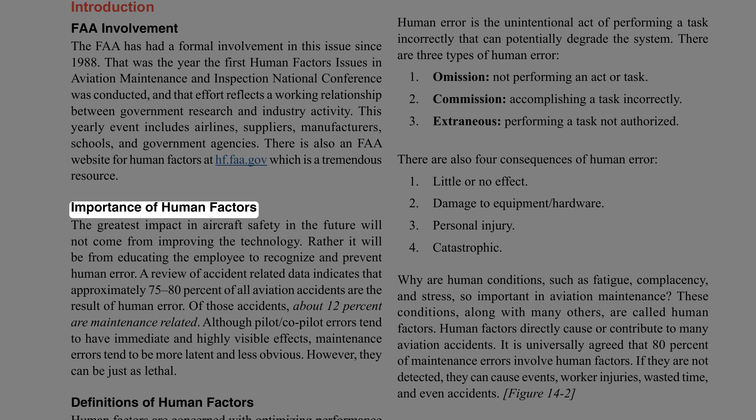Importance of human factors: the greatest impact on aircraft safety in the future will not come from improving the technology, but from educating employees to recognize and prevent human error. A review of accident-related data indicates that approximately 75 to 80% of all aviation accidents are the result of human error. Of those accidents, about 12% are maintenance-related.

Although pilot and co-pilot errors tend to have immediate and highly visible effects, maintenance errors tend to be more latent and less obvious. However, they can be just as lethal.

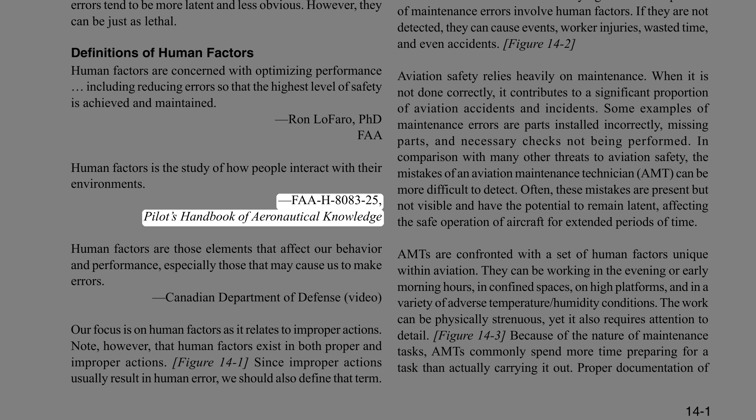Definitions of human factors: Human factors are concerned with optimizing performance, including reducing errors, so that the highest level of safety is achieved and maintained. Ron LoFaro, PhD, FAA: Human factors is the study of how people interact with their environments. From the FAA H-8083-25, Pilot's Handbook of Aeronautical Knowledge: Human factors are those elements that affect our behavior and performance, especially those that may cause us to make errors. Canadian Department of Defense video.

Our focus is on human factors as it relates to improper actions. Note, however, that human factors exist in both proper and improper actions. Since improper actions usually result in human error, we should also define that term. Human error is the unintentional act of performing a task incorrectly that can potentially degrade the system. There are three types of human error: omission, not performing an act or task; commission, accomplishing a task incorrectly; and extraneous, performing a task not authorized.

There are also four consequences of human error: little or no effect, damage to equipment or hardware, personal injury, or catastrophic.

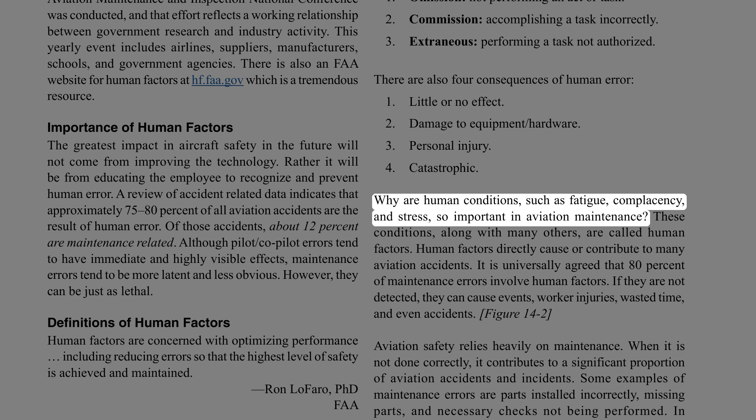Why are human conditions such as fatigue, complacency, and stress so important in aviation maintenance? These conditions, along with many others, are called human factors. Human factors directly cause or contribute to many aviation accidents. It is universally agreed that 80% of maintenance errors involve human factors. If they are not detected, they can cause events, worker injuries, wasted time, and even accidents.

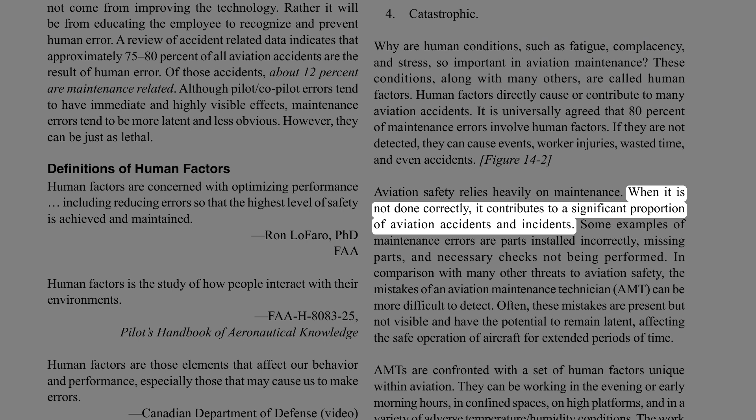Aviation safety relies heavily on maintenance. When it is not done correctly, it contributes to a significant proportion of aviation accidents and incidents. Some examples of maintenance errors are parts installed incorrectly, missing parts, and necessary checks not being performed.

In comparison with many other threats to aviation safety, the mistakes of an aviation maintenance technician (AMT) can be more difficult to detect. Often, these mistakes are present but not visible, and have the potential to remain latent, affecting the safe operation of aircraft for extended periods of time.

AMTs are confronted with a set of human factors unique within aviation. They can be working in the evening or early morning hours, in confined spaces, on high platforms, and in a variety of adverse temperature and humidity conditions. The work can be physically strenuous, yet it also requires attention to detail.

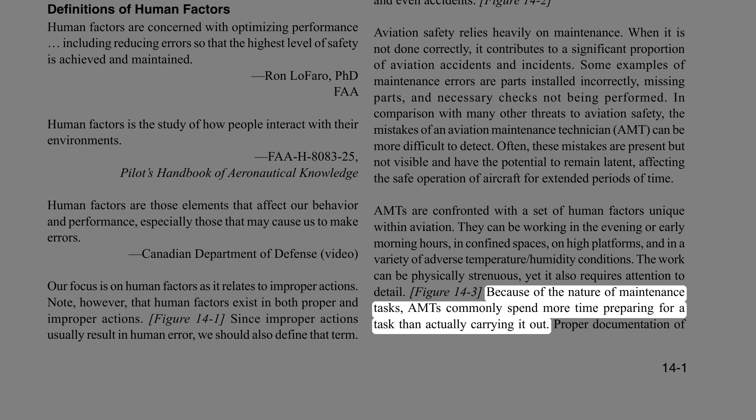Because of the nature of maintenance tasks, AMTs commonly spend more time preparing for a task than actually carrying it out. Proper documentation of all maintenance work is a key element, and AMTs typically spend as much time updating maintenance logs as they do performing the work.

Human factors awareness can lead to improved quality, an environment that ensures continuing worker and aircraft safety, and a more involved and responsible workforce. The reduction of even minor errors can provide measurable benefits, including cost reductions, fewer missed deadlines, reduction in work-related injuries, reduction of warranty claims, and reduction in more significant events that can be traced back to maintenance error.

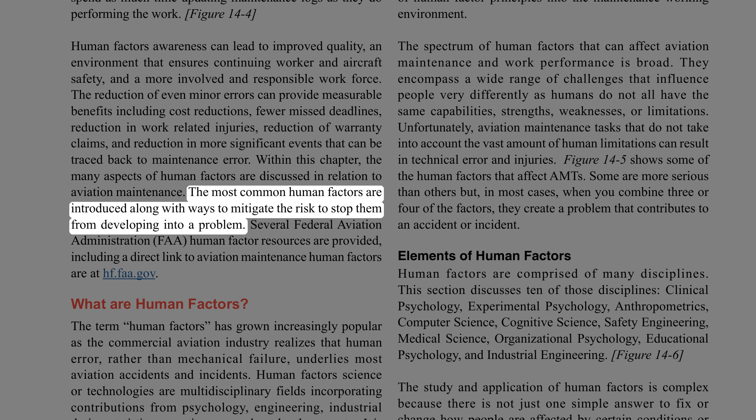Within this chapter, the many aspects of human factors are discussed in relation to aviation maintenance. The most common human factors are introduced along with ways to mitigate the risk to stop them from developing into a problem. Several FAA human factor resources are provided, including a direct link to aviation maintenance human factors at hf.faa.gov.

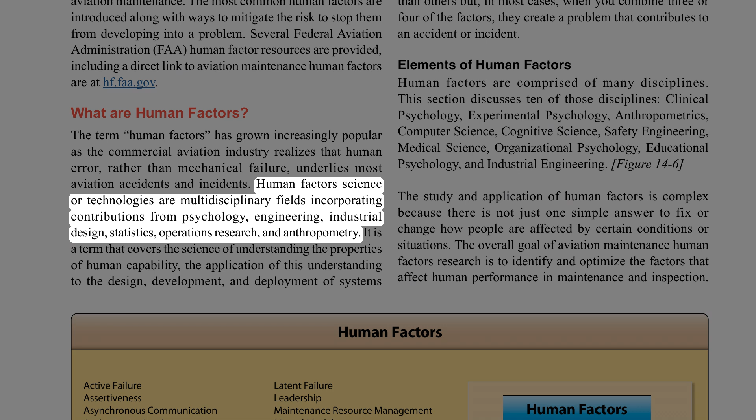What are human factors? The term has grown increasingly popular as the commercial aviation industry realizes that human error, rather than mechanical failure, underlies most aviation accidents and incidents. Human factors science or technologies are multidisciplinary fields incorporating contributions from psychology, engineering, industrial design, statistics, operations research, and anthropometry.

It is a term that covers the science of understanding the properties of human capability, the application of this understanding to the design, development, and deployment of systems and services, and the art of ensuring successful application of human factor principles into the maintenance working environment. The spectrum of human factors that can affect aviation maintenance and work performance is broad.

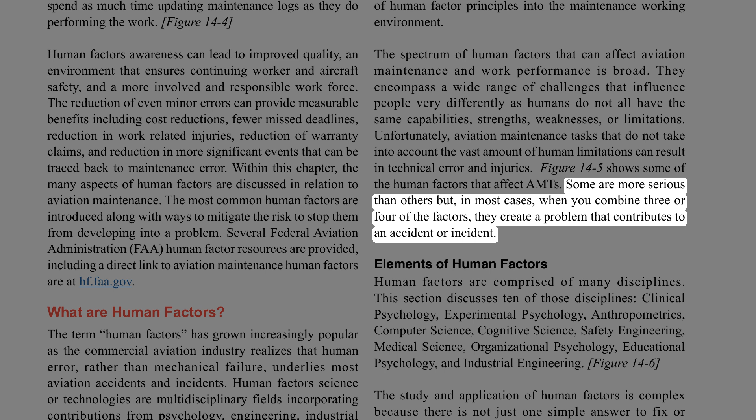They encompass a wide range of challenges that influence people very differently, as humans do not all have the same capabilities, strengths, weaknesses, or limitations. Unfortunately, aviation maintenance tasks that do not take into account the vast amount of human limitations can result in technical error and injuries. Figure 14-5 shows some of the human factors that affect AMTs. Some are more serious than others, but in most cases, when you combine 3 or 4 of the factors, they create a problem that contributes to an accident or incident.

Elements of human factors. Human factors are comprised of many disciplines. This section discusses 10 of those disciplines: clinical psychology, experimental psychology, anthropometrics, computer science, cognitive science, safety engineering, medical science, organizational psychology, educational psychology, and industrial engineering.

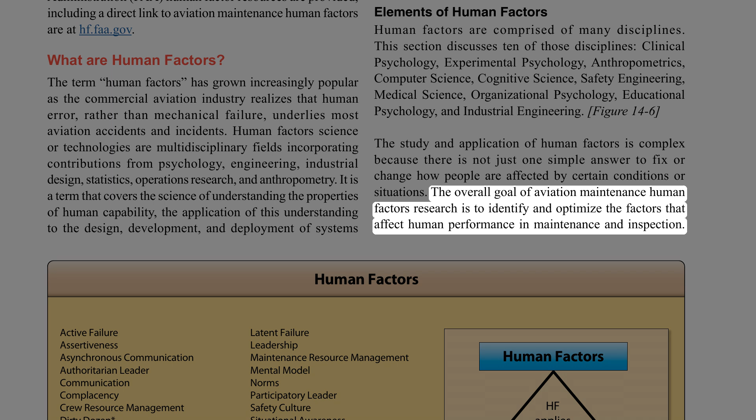The study and application of human factors is complex because there is not just one simple answer to fix or change how people are affected by certain conditions or situations. The overall goal of aviation maintenance human factors research is to identify and optimize the factors that affect human performance in maintenance and inspection. The focus initiates on the technician but extends to the entire engineering and technical organization. Research is optimized by incorporating the many disciplines that affect human factors in an effort to understand how people can work more efficiently and maintain work performance.

By understanding each of the disciplines and applying them to different situations or human behaviors, we can correctly recognize potential human factors and address them before they develop into a problem or create a chain of problems that result in an accident or incident. Clinical psychology.

Clinical psychology includes the study and application of psychology for the purpose of understanding, preventing, and relieving psychologically based distress or dysfunction, and to promote subjective well-being and personal development. It focuses on the mental well-being of the individual. Clinical psychology can help individuals deal with stress, coping mechanisms for adverse situations, poor self-image, and accepting criticism from coworkers.

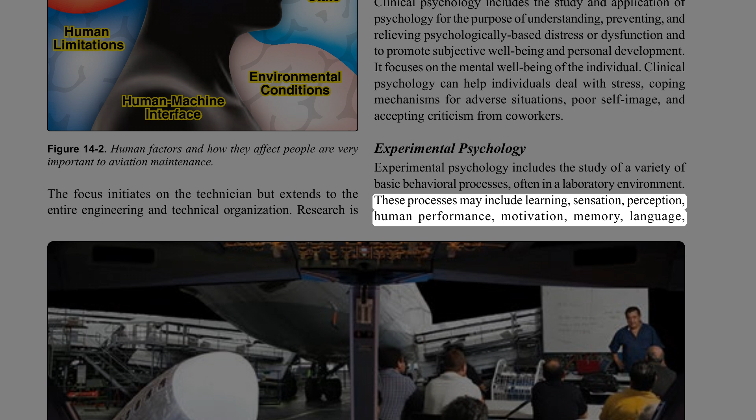Experimental psychology. Experimental psychology includes the study of a variety of basic behavioral processes, often in a laboratory environment. These processes may include learning, sensation, perception, human performance, motivation, memory, language, thinking, and communication, as well as the physiological processes underlying behaviors, such as eating, reading, and problem-solving. In an effort to test the efficiency of work policies and procedures, experimental studies help measure performance, productivity, and deficiencies.

Anthropometry. Anthropometry is the study of the dimensions and abilities of the human body. This is essential to aviation maintenance due to the environment and spaces that AMTs have to work with. For example, a man who is 6 feet 3 inches and weighs 230 pounds may be required to fit into a small crawl space of an aircraft to conduct a repair. Another example is the size and weight of equipment and tools.

Men and women are generally on 2 different spectrums of height and weight. Although both are equally capable of completing the same task with a high level of proficiency, someone who is smaller may be able to perform more efficiently with tools and equipment tailored to their size. In other words, one size does not fit all, and the term average person does not apply when employing such a diverse group of people.

Computer science. The technical definition for computer science is the study of the theoretical foundations of information and computation and of practical techniques for their implementation and application in computer systems. Yet how this relates to aviation maintenance is simpler to explain. As mentioned earlier, AMTs spend as much time documenting repairs as they do performing them. It is important that they have computer workstations that are comfortable and reliable. Software programs and computer-based test equipment should be easy to learn and use, and not intended only for those with high levels of computer literacy.

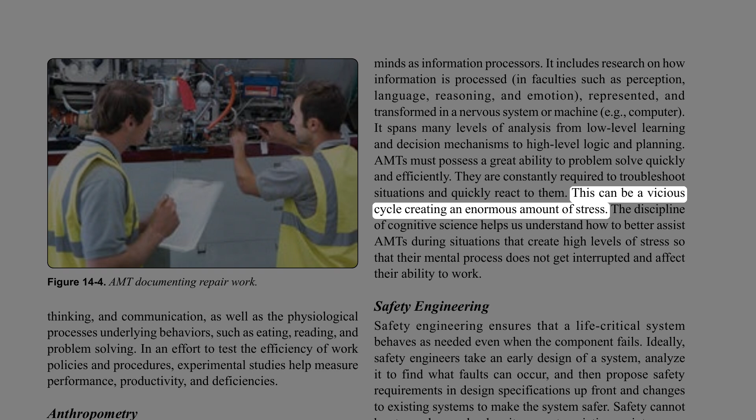AMTs must possess a great ability to problem-solve quickly and efficiently. They are constantly required to troubleshoot situations and quickly react to them. This can be a vicious cycle, creating an enormous amount of stress. The discipline of cognitive science helps us understand how to better assist AMTs during situations that create high levels of stress, so that their mental process does not get interrupted and affect their ability to work.

Safety engineering. Safety engineering ensures that a life-critical system behaves as needed even when the component fails. Ideally, safety engineers take an early design of a system, analyze it to find what faults can occur, and then propose safety requirements in design specifications up front and changes to existing systems to make the system safer.

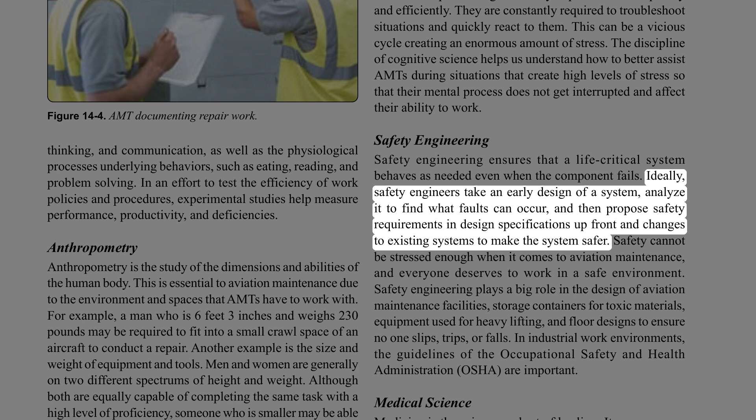Safety cannot be stressed enough when it comes to aviation maintenance, and everyone deserves to work in a safe environment. Safety engineering plays a big role in the design of aviation maintenance facilities, storage containers for toxic materials, equipment used for heavy lifting, and floor designs to ensure no one slips, trips, or falls. In industrial work environments, the guidelines of the Occupational Safety and Health Administration, OSHA, are important.

Medical science. Medicine is the science and art of healing. It encompasses a variety of healthcare practices evolved to maintain and restore health by the prevention and treatment of illness. Disposition and physical well-being are very important and directly correlated to human factors. Just like people come in many shapes and sizes, they also have very different reactions to situations due to body physiology, physical structures, and biomechanics.

Organizational psychology. Organizational psychologists are concerned with relations between people and work. Their interests include organizational structure and organizational change, workers' productivity and job satisfaction, consumer behavior, and the selection, placement, training, and development of personnel. Understanding organizational psychology helps aviation maintenance supervisors learn about the points listed below that, if exercised, can enhance the work environment and productivity.

Rewards and compensations for workers with good safety records. Motivation for workers to want to do well and work safely. Unifying work teams and groups so they get along and work together to get the job done right. Treating all workers equally.

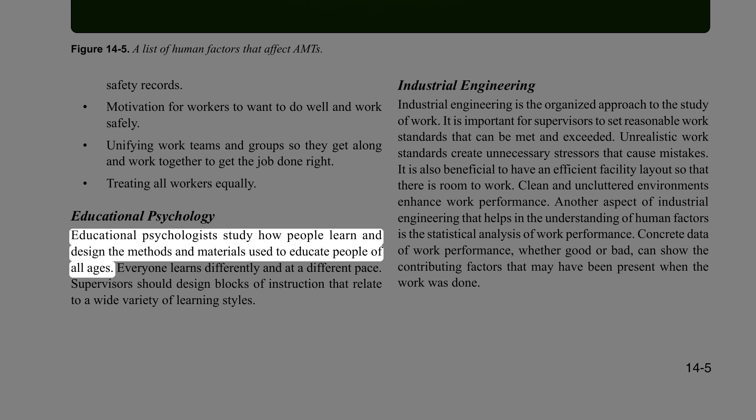Educational psychology. Educational psychologists study how people learn and design the methods and materials used to educate people of all ages. Everyone learns differently and at a different pace. Supervisors should design blocks of instruction that relate to a wide variety of learning styles.

Industrial engineering. Industrial engineering is the organized approach to the study of work. It is important for supervisors to set reasonable work standards that can be met and exceeded. Unrealistic work standards create unnecessary stressors that cause mistakes. It is also beneficial to have an efficient facility layout so that there is room to work. Clean and uncluttered environments enhance work performance.

Another aspect of industrial engineering that helps in the understanding of human factors is the statistical analysis of work performance. Concrete data of work performance, whether good or bad, can show the contributing factors that may have been present when the work was done.

History of human factors. Around 1487, Leonardo da Vinci began research in the area of anthropometrics. The Vitruvian Man, one of his most famous drawings, can be described as one of the earliest sources presenting guidelines for anthropometry. Around the same time, he also began to study the flight of birds.

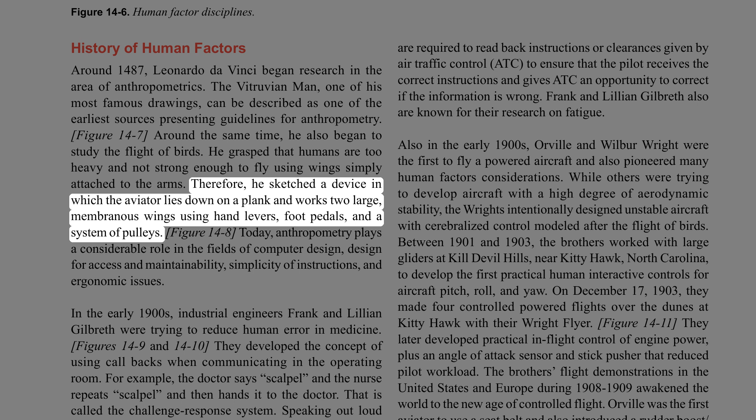He grasped that humans are too heavy and not strong enough to fly using wings simply attached to the arms. Therefore, he sketched a device in which the aviator lies down on a plank and works two large, membranous wings using hand levers, foot pedals, and a system of pulleys. Today, anthropometry plays a considerable role in the fields of computer design, design for access and maintainability, simplicity of instructions, and ergonomic issues.

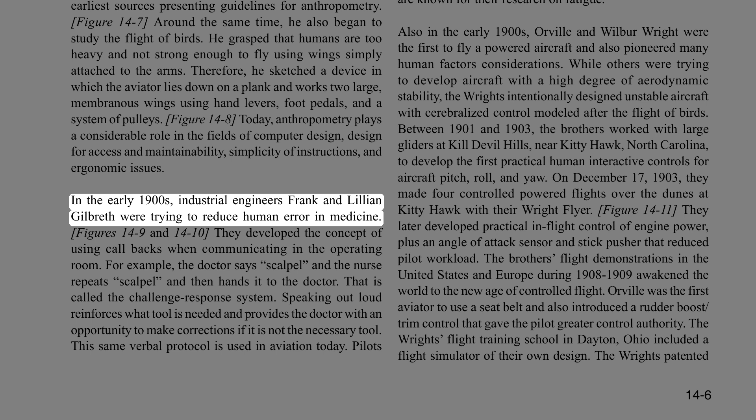In the early 1900s, industrial engineers Frank and Lillian Gilbreth were trying to reduce human error in medicine. They developed the concept of using callbacks when communicating in the operating room. For example, the doctor says, 'Scalpel,' and the nurse repeats, 'Scalpel,' and then hands it to the doctor. That is called the challenge response system.

Speaking out loud reinforces what tool is needed and provides the doctor with an opportunity to make corrections if it is not the necessary tool. This same verbal protocol is used in aviation today. Pilots are required to read back instructions or clearances given by Air Traffic Control, ATC, to ensure that the pilot receives the correct instructions and gives ATC an opportunity to correct if the information is wrong. Frank and Lillian Gilbreth also are known for their research on fatigue.

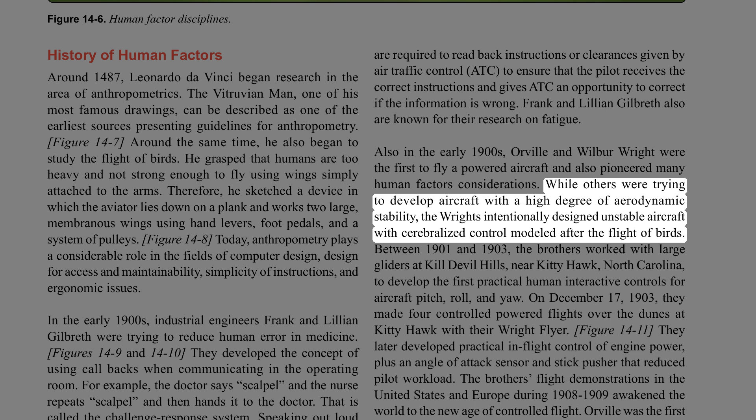Also in the early 1900s, Orville and Wilbur Wright were the first to fly a powered aircraft and also pioneered many human factors considerations. While others were trying to develop aircraft with a high degree of aerodynamic stability, the Wrights intentionally designed unstable aircraft with cerebralized control modeled after the flight of birds.

Between 1901 and 1903, the brothers worked with large gliders at Kill Devil Hills, near Kitty Hawk, North Carolina, to develop the first practical human interactive controls for aircraft pitch, roll, and yaw. On December 17, 1903, they made 4 controlled powered flights over the dunes at Kitty Hawk with their Wright Flyer.

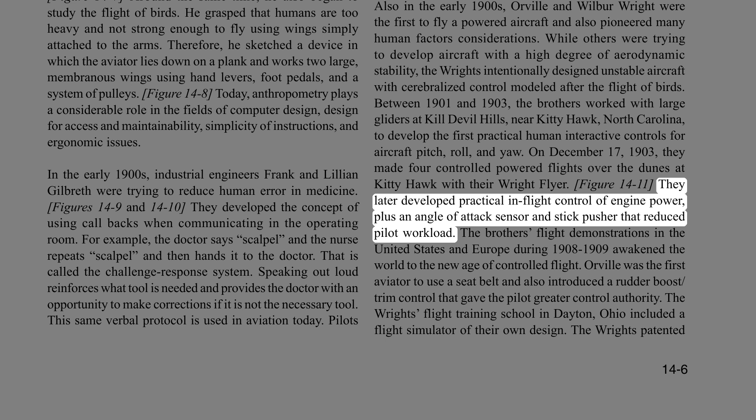They later developed practical in-flight control of engine power, plus an angle of attack sensor and stick pusher that reduced pilot workload. The brothers' flight demonstrations in the United States and Europe during 1908-1909 awakened the world to the new age of controlled flight.

Orville was the first aviator to use a seatbelt and also introduced a rudder boost trim control that gave the pilot greater control authority. The Wright's flight training school in Dayton, Ohio included a flight simulator of their own design. The Wrights patented their practical airplane and flight control concepts, many of which are still in use today.

Prior to World War I, the only test of human-to-machine compatibility was that of trial and error. If the human functioned with the machine, he was accepted; if not, he was rejected. There was a significant change in the concern for humans during the American Civil War. The U.S. Patent Office was concerned about whether the mass-produced uniforms and new weapons could be used effectively by the infantrymen.

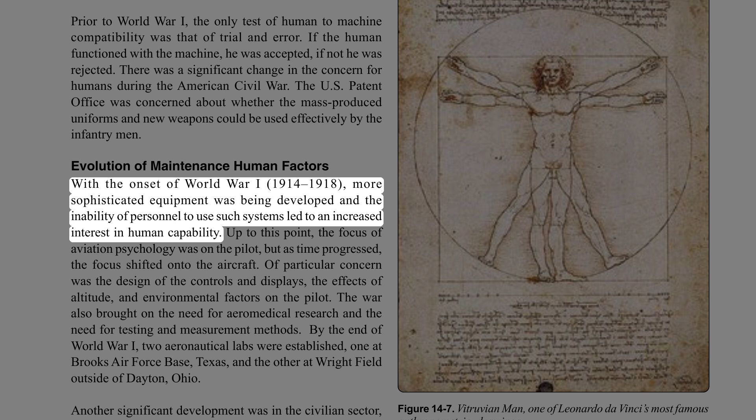With the onset of World War I, 1914 to 1918, more sophisticated equipment was being developed and the inability of personnel to use such systems led to an increased interest in human capability. Up to this point, the focus of aviation psychology was on the pilot, but as time progressed, the focus shifted onto the aircraft. Of particular concern was the design of the controls and displays, the effects of altitude, and environmental factors on the pilot. The war also brought on the need for aeromedical research and the need for testing and measurement methods. By the end of World War I, two aeronautical labs were established, one at Brooks Air Force Base, Texas, and the other at Wright Field outside of Dayton, Ohio.

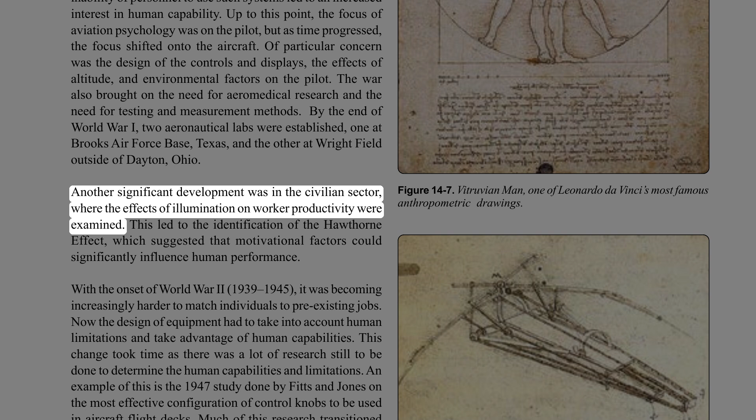Another significant development was in the civilian sector, where the effects of illumination on worker productivity were examined. This led to the identification of the Hawthorne effect, which suggested that motivational factors could significantly influence human performance.

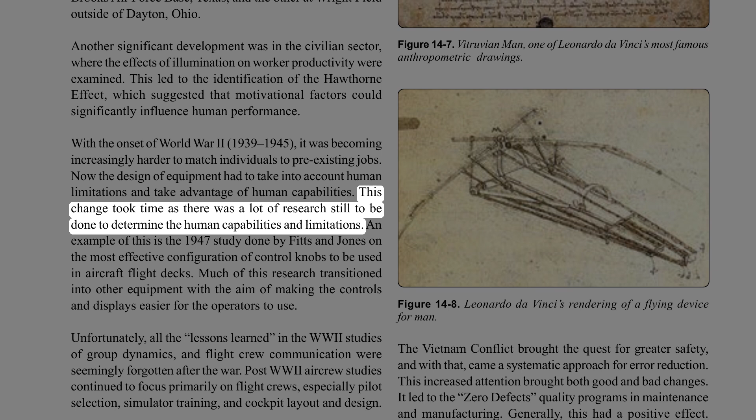With the onset of World War II, 1939 to 1945, it was becoming increasingly harder to match individuals to pre-existing jobs. Now the design of equipment had to take into account human limitations and take advantage of human capabilities. This change took time as there was a lot of research still to be done to determine the human capabilities and limitations. An example of this is the 1947 study done by Fitts and Jones on the most effective configuration of control knobs to be used in aircraft flight decks.

Much of this research transitioned into other equipment with the aim of making the controls and displays easier for the operators to use. Unfortunately, all the lessons learned in the World War II studies of group dynamics and flight crew communication were seemingly forgotten after the war.

Post-World War II aircrew studies continued to focus primarily on flight crews, especially pilot selection, simulator training, and cockpit layout and design. Subsequent studies of the technician focused on individual competency and included equipment design, ergonomics.

The Vietnam conflict brought the quest for greater safety, and with that, came a systematic approach for error reduction. This increased attention brought both good and bad changes. It led to the zero defects quality programs in maintenance and manufacturing. Generally, this had a positive effect.

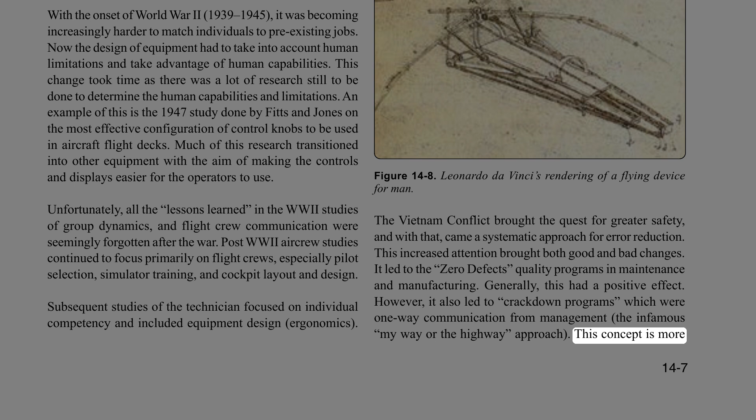However, it also led to crackdown programs, which were one-way communication from management, the infamous 'my way or the highway' approach. This concept is more dictatorial than democratic, and typically had a long-term negative effect on the company. This crackdown approach for behavior control is based upon fear and punishment, which creates a problem. Errors are driven into hiding, and then become apparent later, usually at a more critical time, Murphy's Law.

Additional attempts to develop foolproof equipment designs were added to the zero-defect manufacturing goal and began to find recognition in the maintenance world as well. Subsequent efforts focused on effects of positive rather than negative motivators. The results of this effort were a reversal of the crackdown method, and motivation due to increased morale often improved maintenance safety performance. Studies have shown that motivation resulting from negative sources seldom achieved the same effect.

This led to a participative management style recognized by some U.S. industry and a few airlines, but did not reach maintenance operations until much later. The airline deregulation, 1978 to 1988, effort had a profound effect upon the aviation community.

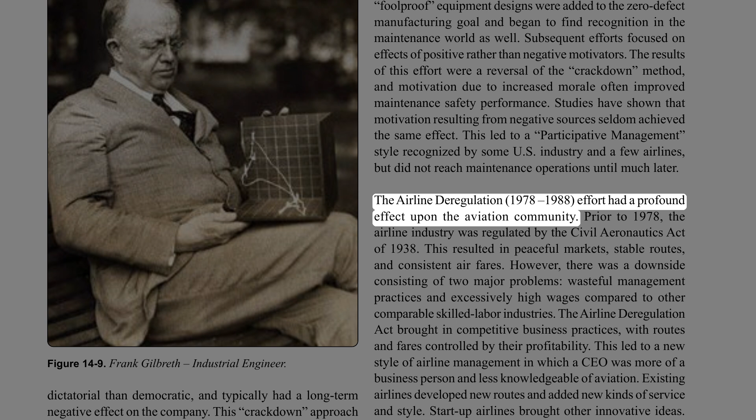Prior to 1978, the airline industry was regulated by the Civil Aeronautics Act of 1938. This resulted in peaceful markets, stable routes, and consistent airfares. However, there was a downside consisting of two major problems: wasteful management practices and excessively high wages compared to other comparable skilled labor industries. The Airline Deregulation Act brought in competitive business practices, with routes and fares controlled by their profitability.

This led to a new style of airline management in which a CEO was more of a business person and less knowledgeable of aviation. Existing airlines developed new routes and added new kinds of service and style. Startup airlines brought other innovative ideas. The numerous mergers and acquisitions added an increasing pressure to focus on the financial bottom line. Doing more with less became the byline.

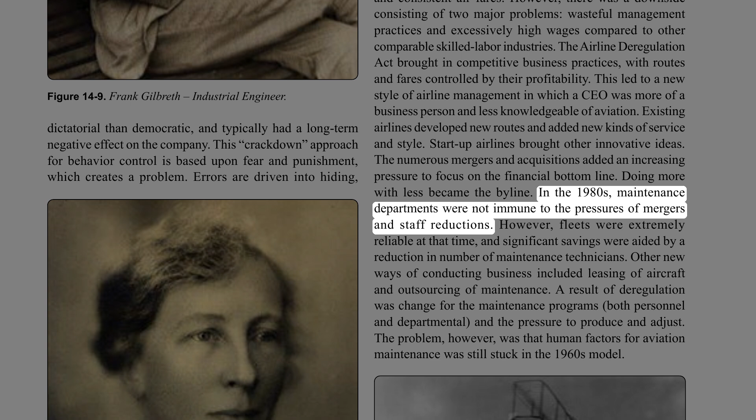In the 1980s, maintenance departments were not immune to the pressures of mergers and staff reductions. However, fleets were extremely reliable at that time, and significant savings were aided by a reduction in the number of maintenance technicians. Other new ways of conducting business included leasing of aircraft and outsourcing of maintenance.

A result of deregulation was change for the maintenance programs, both personnel and departmental, and the pressure to produce and adjust. The problem, however, was that human factors for aviation maintenance was still stuck in the 1960s model.

A detailed review of aviation literature published between 1976 and 1987 had very little to say about maintenance. Out of 50 published articles, only 15 even mention maintenance. Most of these articles deal with ergonomics. One article examines military engine design to solider-proof the maintenance duties, and one U.S. Navy article advocated more management control.

As human factors awareness progressed, a culture change occurred in U.S. carriers in the 1990s. Management behavior began to change, there were practical applications of systems thinking, organization structure was revised, and new strategy, policy, and values emerged. Virtually all of these involved communication and collaboration.

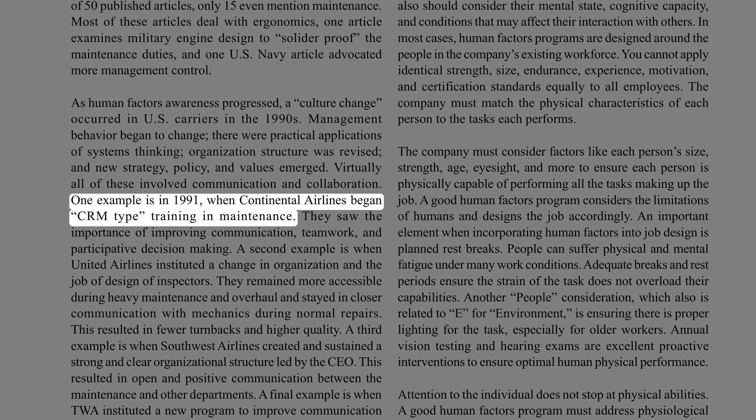One example is in 1991, when Continental Airlines began CRM-type training in maintenance. They saw the importance of improving communication, teamwork, and participative decision-making.

A second example is when United Airlines instituted a change in organization and the job design of inspectors. They remained more accessible during heavy maintenance and overhaul and stayed in closer communication with mechanics during normal repairs. This resulted in fewer turnbacks and higher quality.

A third example is when Southwest Airlines created and sustained a strong and clear organizational structure led by the CEO. This resulted in open and positive communication between the maintenance and other departments.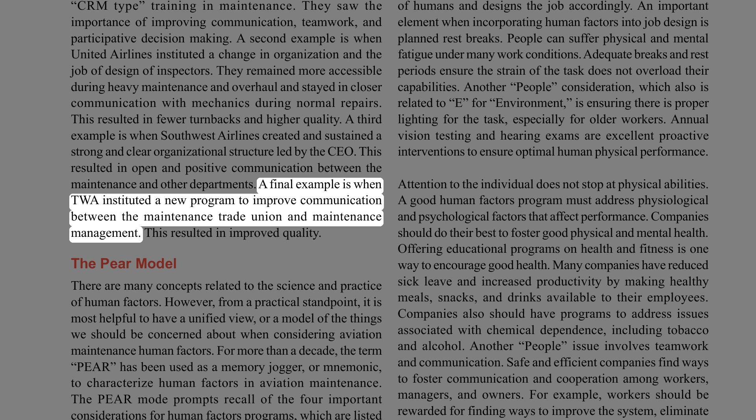A final example is when TWA instituted a new program to improve communication between the maintenance trade union and maintenance management. This resulted in improved quality.

The PEAR Model. There are many concepts related to the science and practice of human factors. However, from a practical standpoint, it is most helpful to have a unified view, or a model, of the things we should be concerned about when considering aviation maintenance human factors.

For more than a decade, the term PEAR has been used as a memory jogger, or mnemonic, to characterize human factors in aviation maintenance. The PEAR model prompts recall of the 4 important considerations for human factors programs: People who do the job, Environment in which they work, Actions they perform, and Resources necessary to complete the job.

People. Aviation maintenance human factors programs focus on the people who perform the work and address physical, physiological, psychological, and psychosocial factors. The programs must focus on individuals, their physical capabilities, and the factors that affect them. They also should consider their mental state, cognitive capacity, and conditions that may affect their interaction with others.

In most cases, human factors programs are designed around the people in the company's existing workforce. You cannot apply identical strength, size, endurance, experience, motivation, and certification standards equally to all employees. The company must match the physical characteristics of each person to the tasks each performs, considering factors like size, strength, age, eyesight, and more to ensure each person is physically capable of performing all the tasks making up the job.

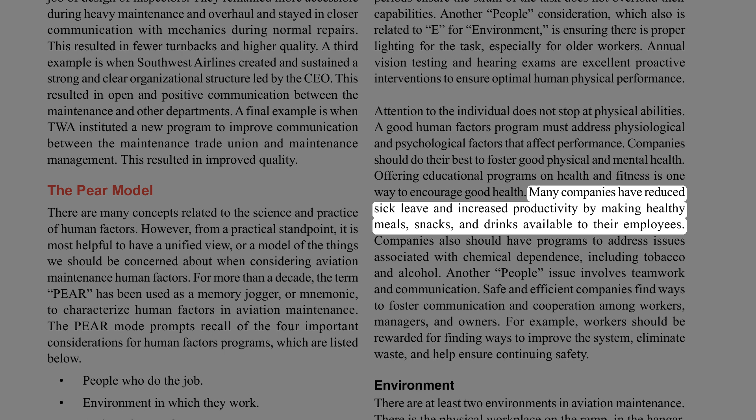Attention to the individual does not stop at physical abilities. A good human factors program must address physiological and psychological factors that affect performance. Companies should do their best to foster good physical and mental health. Offering educational programs on health and fitness is one way to encourage good health. Many companies have reduced sick leave and increased productivity by making healthy meals, snacks, and drinks available to their employees. Companies also should have programs to address issues associated with chemical dependence, including tobacco and alcohol.

Another people issue involves teamwork and communication. Safe and efficient companies find ways to foster communication and cooperation among workers, managers, and owners. For example, workers should be rewarded for finding ways to improve the system, eliminate waste, and help ensure continuing safety.

Environment. There are at least two environments in aviation maintenance. There is the physical workplace on the ramp, in the hangar, or in the shop. In addition, there is the organizational environment that exists within the company.

A human factors program must pay attention to both environments. Physical. The physical environment is obvious. It includes ranges of temperature, humidity, lighting, noise control, cleanliness, and workplace design.

Companies must acknowledge these conditions and cooperate with the workforce to either accommodate or change the physical environment. It takes a corporate commitment to address the physical environment. This topic overlaps with the resources component of Pear when it comes to providing portable heaters, coolers, lighting, clothing, and good workplace and task design.

Organizational. The second, less tangible, environment is the organizational one. The important factors in an organizational environment are typically related to cooperation, communication, shared values, mutual respect, and the culture of the company. An excellent organizational environment is promoted with leadership, communication, and shared goals associated with safety, profitability, and other key factors. The best companies guide and support their people and foster a culture of safety.

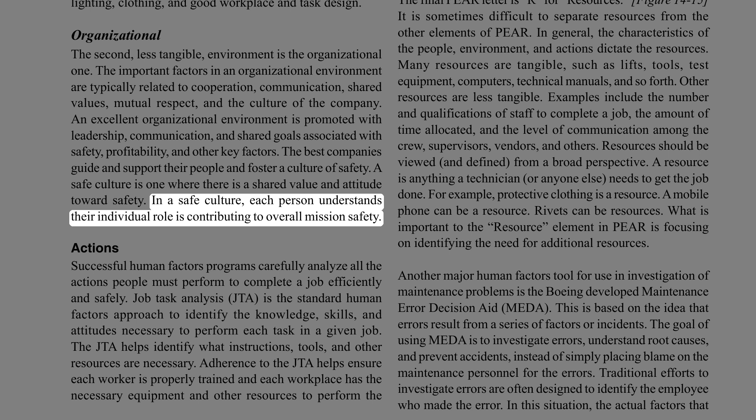A safe culture is one where there is a shared value and attitude toward safety. In a safe culture, each person understands their individual role is contributing to overall mission safety.

Actions. Successful human factors programs carefully analyze all the actions people must perform to complete a job efficiently and safely. Job Task Analysis, JTA, is the standard human factors approach to identify the knowledge, skills, and attitudes necessary to perform each task in a given job.

The JTA helps identify what instructions, tools, and other resources are necessary. Adherence to the JTA helps ensure each worker is properly trained and each workplace has the necessary equipment and other resources to perform the job. Many regulatory authorities require that the JTA serve as the basis for the company's general maintenance manual and training plan.

Many human factors challenges associated with use of job cards and technical documentation fall under actions. Clearly understandable documentation of actions ensures instructions and checklists are correct and usable.

Resources. The final Pear letter is R for resources. It is sometimes difficult to separate resources from the other elements of Pear. In general, the characteristics of the people, environment, and actions dictate the resources.

Many resources are tangible, such as lifts, tools, test equipment, computers, technical manuals, and so forth. Other resources are less tangible. Examples include the number and qualifications of staff to complete a job, the amount of time allocated, and the level of communication among the crew, supervisors, vendors, and others.

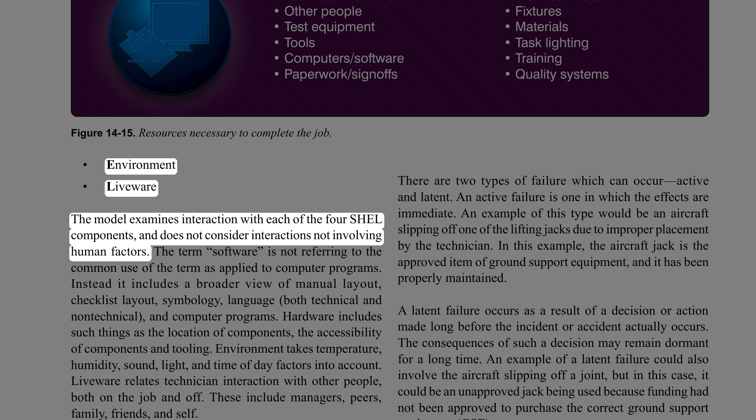Instead, it includes a broader view of manual layout, checklist layout, symbology, language, both technical and non-technical, and computer programs. Hardware includes such things as the location of components, the accessibility of components, and tooling.

Environment takes temperature, humidity, sound, light, and time of day factors into account. Liveware relates technician interaction with other people, both on the job and off. These include managers, peers, family, friends, and self.

No discussion of human factors is complete without reference to James Reason's model of accident causation. This diagram, which was introduced in 1990 and revised by Dr. Reason in 1993, is often referred to as the Swiss cheese model and shows how various holes in different systems must be aligned in order for an error to occur.

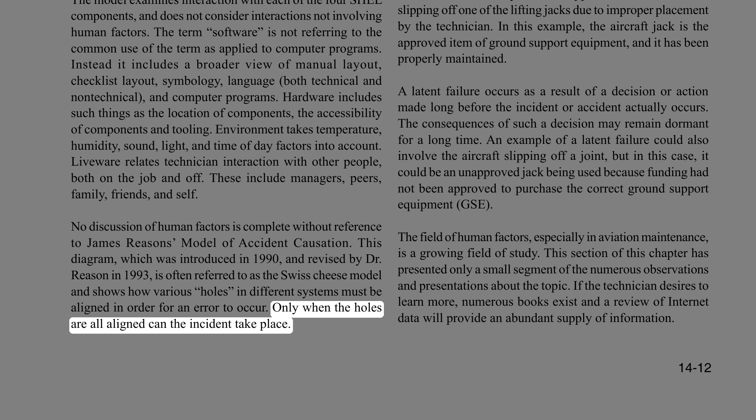Only when the holes are all aligned can the incident take place. There are two types of failure which can occur, active and latent. An active failure is one in which the effects are immediate. An example of this type would be an aircraft slipping off one of the lifting jacks due to improper placement by the technician.

In this example, the aircraft jack is the approved item of ground support equipment and has been properly maintained. A latent failure occurs as a result of a decision or action made long before the incident or accident actually occurs. The consequences of such a decision may remain dormant for a long time.

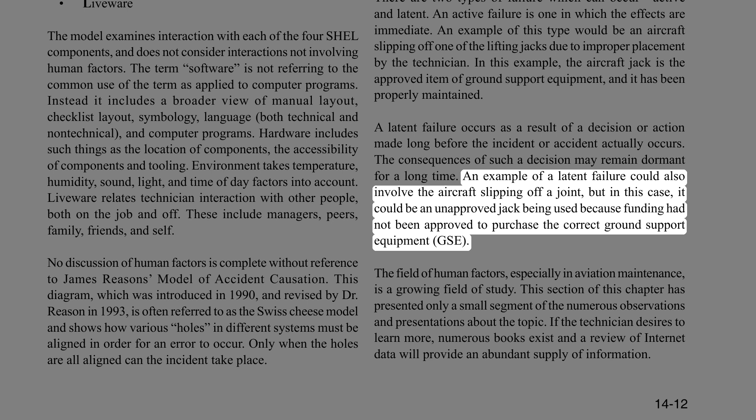An example of a latent failure could also involve the aircraft slipping off a jack, but in this case it could be an unapproved jack being used because funding had not been approved to purchase the correct ground support equipment, GSE. The field of human factors, especially in aviation maintenance, is a growing field of study.

This section of this chapter has presented only a small segment of the numerous observations and presentations about the topic. If the technician desires to learn more, numerous books exist and a review of internet data will provide an abundant supply of information. A good place to start researching would be the FAA's own website at hf.faa.gov.

This site, titled Human Factors in Aviation Maintenance and Inspection, HFAMI, provides access to products of the Federal Aviation Administration Flight Standards Service Human Factors in Aviation Maintenance and Inspection Program.

Many aviation maintenance industry trade magazines include a section or at least a page devoted to human factors. The Human Factors and Ergonomics Society is a national organization composed of 22 technical groups, including one devoted to aerospace systems, which address both civilian and military issues of safety and performance.

Human error is defined as a human action with unintended consequences. When you couple error with aviation maintenance and the negative consequences that it produces, it becomes extremely troublesome.

Training, risk assessments, safety inspections, etc., should not be restricted to an attempt to avoid errors but rather to make them visible and identify them before they produce damaging and regrettable consequences. Simply put, human error is not avoidable but it is manageable.

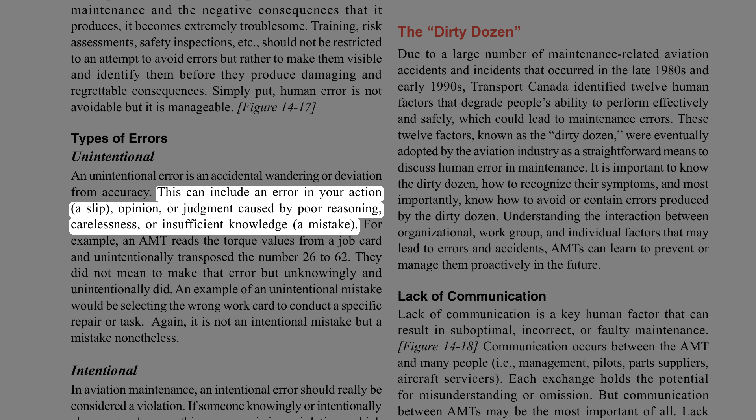Types of errors. Unintentional: an unintentional error is an accidental wandering or deviation from accuracy. This can include an error in your action, a slip, opinion, or judgment caused by poor reasoning, carelessness, or insufficient knowledge, a mistake.

For example, an AMT reads the torque values from a job card and unintentionally transposes the number 26 to 62. They did not mean to make that error but unknowingly and unintentionally did. An example of an unintentional mistake would be selecting the wrong work card to conduct a specific repair or task. Again, it is not an intentional mistake but a mistake nonetheless.

Intentional: in aviation maintenance, an intentional error should really be considered a violation. If someone knowingly or intentionally chooses to do something wrong, it is a violation, which means that one has purposely deviated from safe practices, procedures, standards, or regulations.

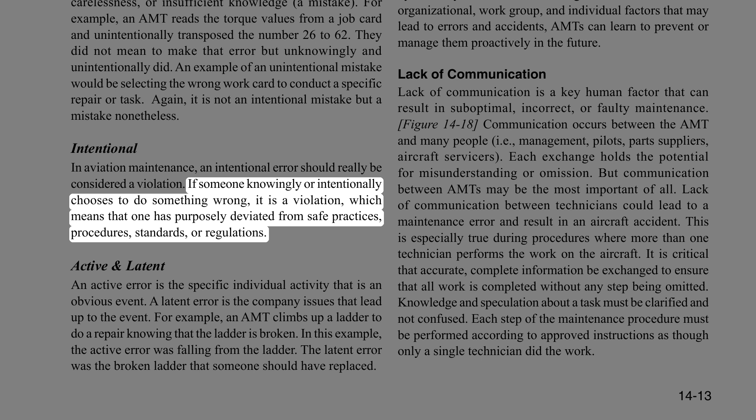Active and latent: an active error is the specific individual activity that is an obvious event. A latent error is the company issues that lead up to the event. For example, an AMT climbs up a ladder to do a repair knowing that the ladder is broken. In this example, the active error was falling from the ladder. The latent error was the broken ladder that someone should have replaced.

The dirty dozen. Due to a large number of maintenance-related aviation accidents and incidents that occurred in the late 1980s and early 1990s, Transport Canada identified 12 human factors that degrade people's ability to perform effectively and safely, which could lead to maintenance errors. These 12 factors, known as the dirty dozen, were eventually adopted by the aviation industry as a straightforward means to discuss human error in maintenance.

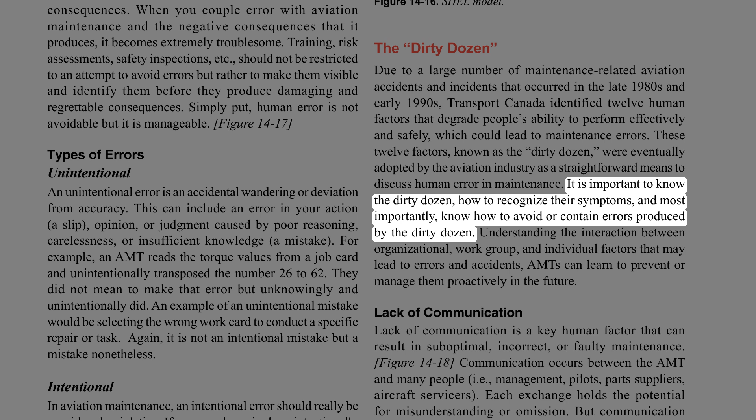It is important to know the dirty dozen, how to recognize their symptoms, and most importantly, know how to avoid or contain errors produced by the dirty dozen. Understanding the interaction between organizational, workgroup, and individual factors that may lead to errors and accidents, AMTs can learn to prevent or manage them proactively in the future.

Lack of communication is a key human factor that can result in suboptimal, incorrect, or faulty maintenance. Communication occurs between the AMT and many people, i.e., management, pilots, parts suppliers, aircraft servicers. Each exchange holds the potential for misunderstanding or omission, but communication between AMTs may be the most important of all.

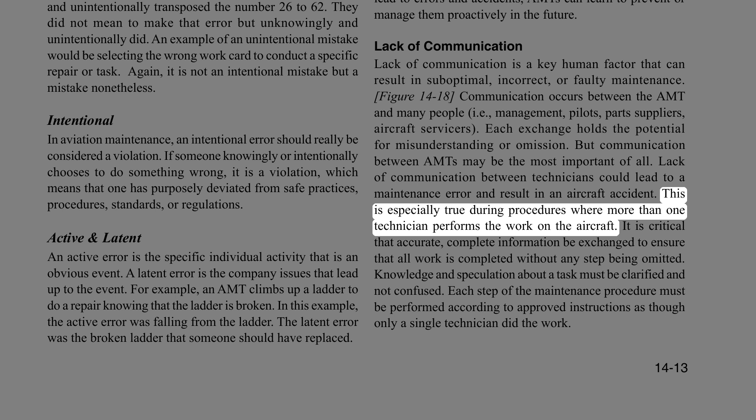Lack of communication between technicians could lead to a maintenance error and result in an aircraft accident. This is especially true during procedures where more than one technician performs the work on the aircraft. It is critical that accurate, complete information be exchanged to ensure that all work is completed without any step being omitted. Knowledge and speculation about a task must be clarified and not confused. Each step of the maintenance procedure must be performed according to approved instructions as though only a single technician did the work.

A common scenario where communication is critical, and a lack thereof can cause problems, is during shift change in an airline or fixed base operator (FBO) operation. A partially completed job is transferred from the technician finishing their workday to the technician coming on duty.

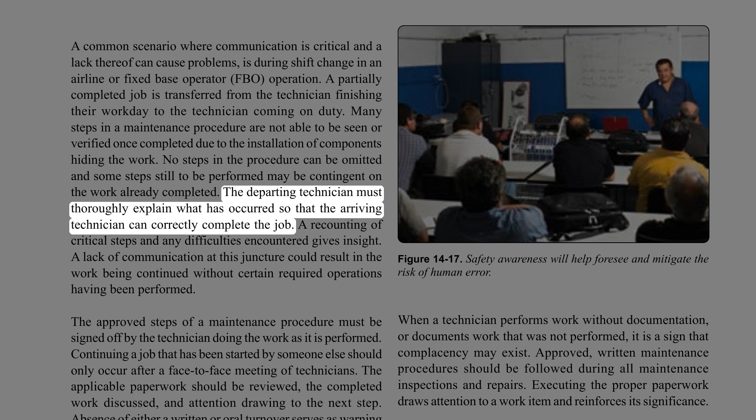Many steps in a maintenance procedure cannot be seen or verified once completed, due to components hiding the work. No steps can be omitted, and some steps still to be performed may be contingent on work already completed. The departing technician must thoroughly explain what has occurred so the arriving technician can correctly complete the job. A recounting of critical steps and any difficulties encountered gives insight.

A lack of communication at this juncture could result in the work being continued without certain required operations having been performed. The approved steps of a maintenance procedure must be signed off by the technician doing the work as it is performed. Continuing a job started by someone else should only occur after a face-to-face meeting of technicians.

Absence of either a written or oral turnover serves as a warning that an error could occur. It is vital that work not be continued on a project without both oral and written communication between the technician who started the job and the technician continuing it.

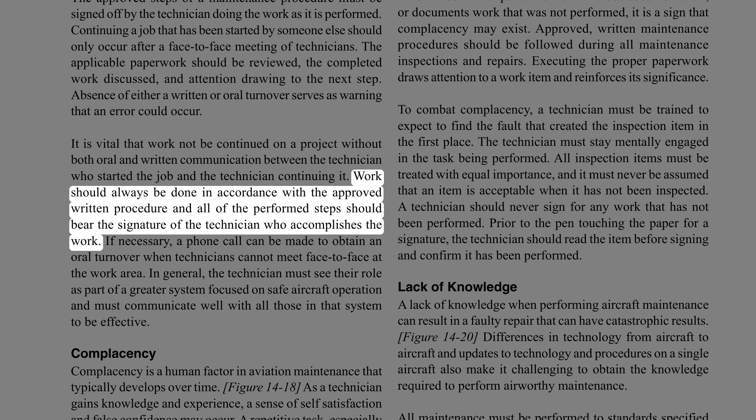Work should always be done in accordance with the approved written procedure, and all performed steps should bear the signature of the technician who accomplishes the work. If necessary, a phone call can be made to obtain an oral turnover when technicians cannot meet face-to-face at the work area. In general, the technician must see their role as part of a greater system focused on safe aircraft operation, and must communicate well with all those in that system to be effective.

Complacency is a human factor in aviation maintenance that typically develops over time. As a technician gains knowledge and experience, a sense of self-satisfaction and false confidence may occur. A repetitive task, especially an inspection item, may be overlooked or skipped because the technician has performed the task a number of times without ever finding a fault.

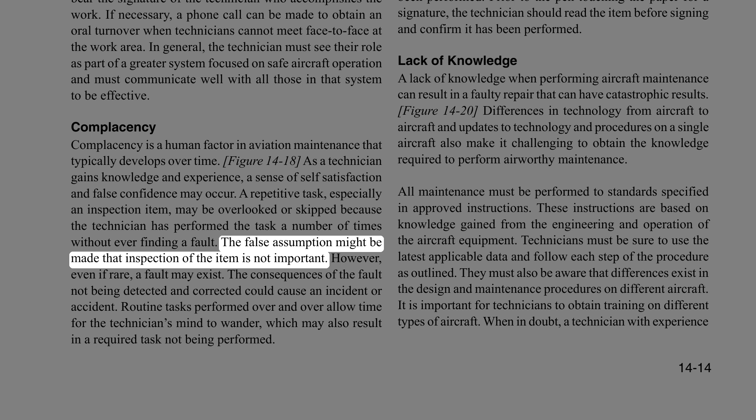The false assumption might be made that inspection of the item is not important. However, even if rare, a fault may exist. The consequences of the fault not being detected and corrected could cause an incident or accident. Routine tasks performed over and over allow time for the technician's mind to wander, which may also result in a required task not being performed.

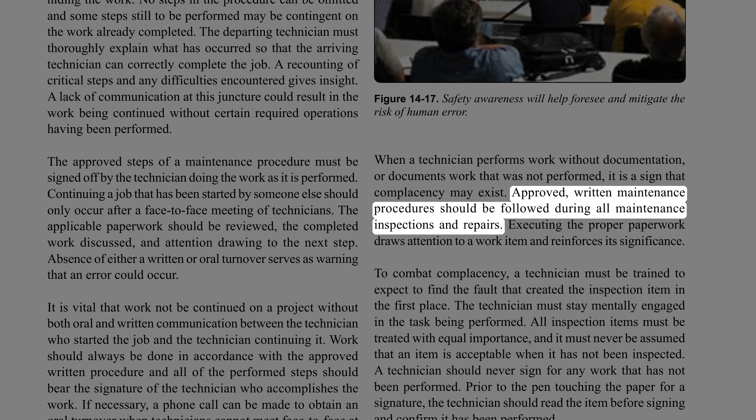When a technician performs work without documentation, or documents work that was not performed, it is a sign that complacency may exist. Approved, written maintenance procedures should be followed during all maintenance inspections and repairs. Executing the proper paperwork draws attention to a work item and reinforces its significance.

To combat complacency, a technician must be trained to expect to find the fault that created the inspection item in the first place. The technician must stay mentally engaged in the task being performed. All inspection items must be treated with equal importance, and it must never be assumed that an item is acceptable when it has not been inspected.

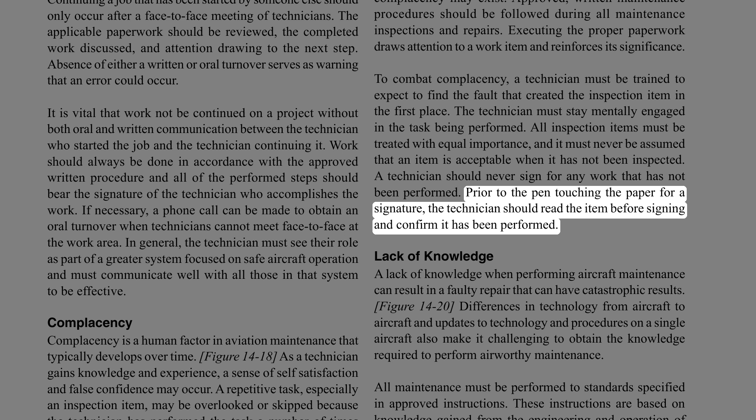A technician should never sign for any work that has not been performed. Prior to the pen touching the paper for a signature, the technician should read the item before signing and confirm it has been performed. Lack of knowledge.

A lack of knowledge when performing aircraft maintenance can result in a faulty repair that can have catastrophic results. Differences in technology from aircraft to aircraft, and updates to technology and procedures on a single aircraft, also make it challenging to obtain the knowledge required to perform airworthy maintenance.

All maintenance must be performed to standards specified in approved instructions. These instructions are based on knowledge gained from the engineering and operation of the aircraft equipment. Technicians must be sure to use the latest applicable data and follow each step of the procedure as outlined. They must also be aware that differences exist in the design and maintenance procedures on different aircraft.

It is important for technicians to obtain training on different types of aircraft. When in doubt, a technician with experience on the aircraft should be consulted. If one is not available, or the consulted technician is not familiar with the procedure, a manufacturer's technical representative should be contacted. It is better to delay a maintenance procedure than to do it incorrectly and cause an accident.

Distraction. A distraction while performing maintenance on an aircraft may disrupt the procedure. When work resumes, it is possible that the technician skips over a detail that needs attention. It is estimated that 15% of maintenance-related errors are caused by distractions. Distractions can be mental or physical in nature.

They can occur when the work is located on the aircraft or in the hangar. They can also occur in the psyche of the technician independent of the work environment. Something as simple as a cell phone call or a new aircraft being pushed into the hangar can disrupt the technician's concentration on a job.

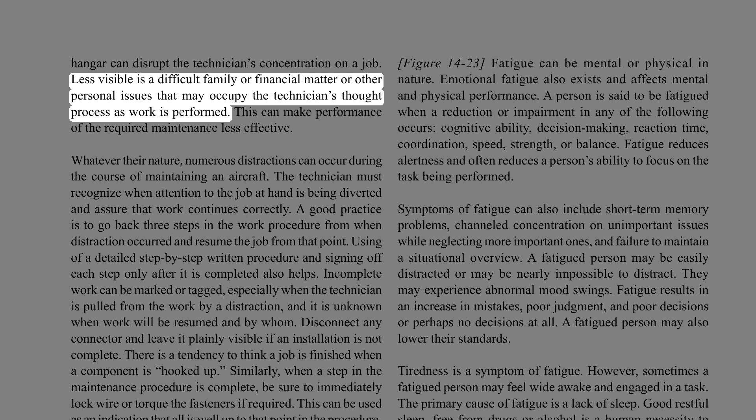Less visible is a difficult family or financial matter or other personal issues that may occupy the technician's thought process as work is performed. This can make performance of the required maintenance less effective. Whatever their nature, numerous distractions can occur during the course of maintaining an aircraft.

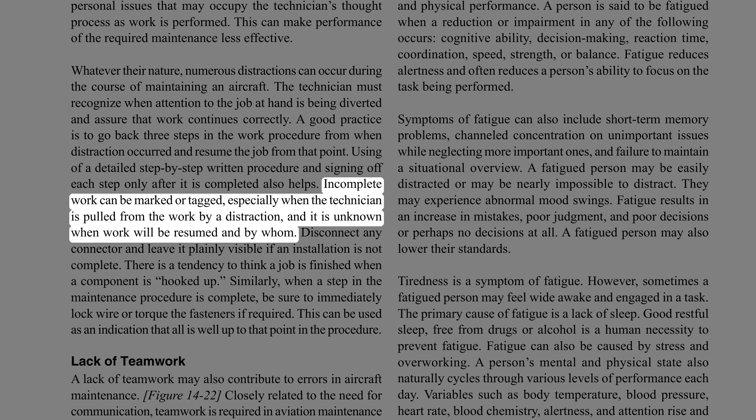The technician must recognize when attention to the job at hand is being diverted and assure that work continues correctly. A good practice is to go back 3 steps in the work procedure from when distraction occurred and resume the job from that point. Using a detailed step-by-step written procedure and signing off each step only after it is completed also helps. Incomplete work can be marked or tagged, especially when the technician is pulled from the work by a distraction, and it is unknown when work will be resumed and by whom.

Disconnect any connector and leave it plainly visible if an installation is not complete. There is a tendency to think a job is finished when a component is hooked up. Similarly, when a step in the maintenance procedure is complete, be sure to immediately lock wire or torque the fasteners if required. This can be used as an indication that all is well up to that point in the procedure.

Lack of teamwork may also contribute to errors in aircraft maintenance. Closely related to the need for communication, teamwork is required in aviation maintenance in many instances. Sharing of knowledge between technicians, coordinating maintenance functions, turning work over from shift to shift, and working with flight personnel to troubleshoot and test aircraft are executed better in an atmosphere of teamwork.

Often associated with improved safety in the workplace, teamwork involves everyone understanding and agreeing on actions to be taken. A gear swing or other operational check involves all the members of a team working together. Multiple technicians contribute to the effort to ensure a single outcome. They communicate and look out for one another as they do the job. A consensus is formed that the item is airworthy or not airworthy.

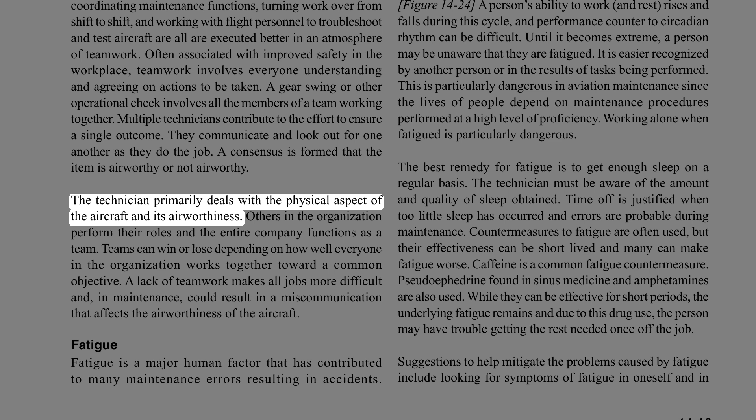The technician primarily deals with the physical aspect of the aircraft and its airworthiness. Others in the organization perform their roles and the entire company functions as a team. Teams can win or lose depending on how well everyone in the organization works together toward a common objective. A lack of teamwork makes all jobs more difficult and, in maintenance, could result in a miscommunication that affects the airworthiness of the aircraft.

Fatigue is a major human factor that has contributed to many maintenance errors resulting in accidents. Fatigue can be mental or physical in nature. Emotional fatigue also exists and affects mental and physical performance. A person is said to be fatigued when a reduction or impairment in any of the following occurs: cognitive ability, decision-making, reaction time, coordination, speed, strength, or balance.

Fatigue reduces alertness and often reduces a person's ability to focus on the task being performed. Symptoms of fatigue can also include short-term memory problems, channeled concentration on unimportant issues while neglecting more important ones, and failure to maintain a situational overview. A fatigued person may be easily distracted or may be nearly impossible to distract. They may experience abnormal mood swings.

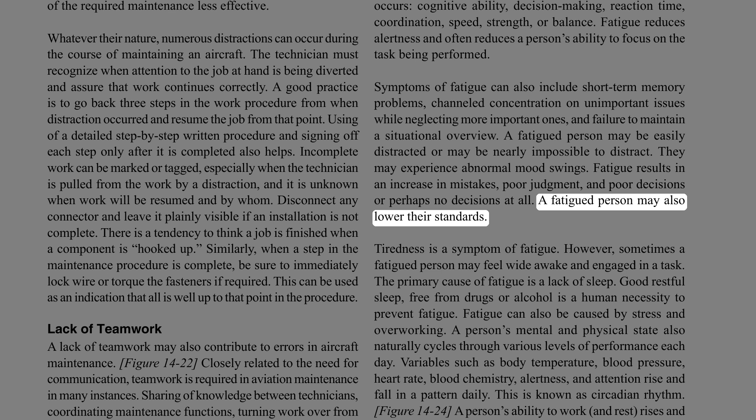Fatigue results in an increase in mistakes, poor judgment, and poor decisions or perhaps no decisions at all. A fatigued person may also lower their standards. Tiredness is a symptom of fatigue. However, sometimes a fatigued person may feel wide awake and engaged in a task.

The primary cause of fatigue is a lack of sleep. Good restful sleep, free from drugs or alcohol, is a human necessity to prevent fatigue. Fatigue can also be caused by stress and overworking. A person's mental and physical state also naturally cycles through various levels of performance each day. Variables such as body temperature, blood pressure, heart rate, blood chemistry, alertness, and attention rise and fall in a pattern daily. This is known as circadian rhythm.

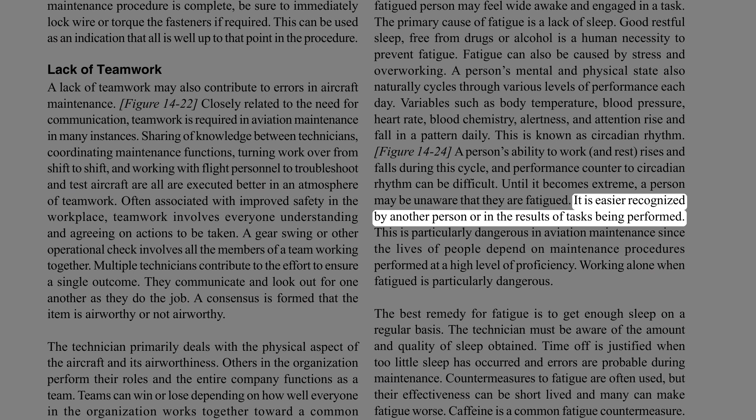A person's ability to work and rest rises and falls during this cycle, and performance counter to circadian rhythm can be difficult. Until it becomes extreme, a person may be unaware that they are fatigued. It is easier recognized by another person or in the results of tasks being performed. This is particularly dangerous in aviation maintenance since the lives of people depend on maintenance procedures performed at a high level of proficiency. Working alone when fatigued is particularly dangerous. The best remedy for fatigue is to get enough sleep on a regular basis. The technician must be aware of the amount and quality of sleep obtained.

Time off is justified when too little sleep has occurred and errors are probable during maintenance. Countermeasures to fatigue are often used, but their effectiveness can be short-lived and many can make fatigue worse.

Caffeine is a common fatigue countermeasure. Pseudoephedrine found in sinus medicine and amphetamines are also used. While they can be effective for short periods, the underlying fatigue remains, and due to this drug use, the person may have trouble getting the rest needed once off the job.

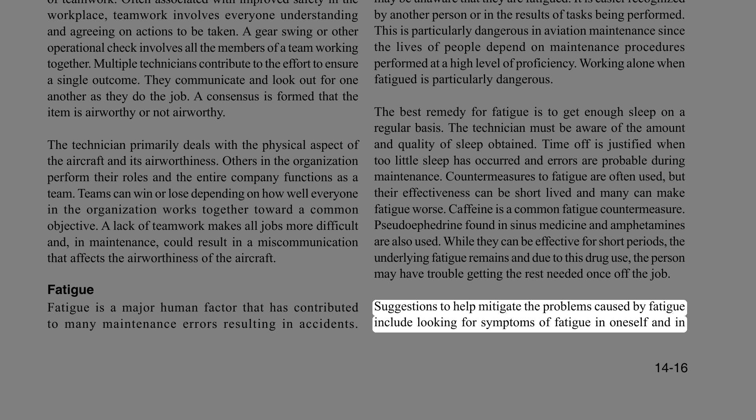Suggestions to help mitigate the problems caused by fatigue include looking for symptoms of fatigue in oneself and in others. Have others check your work, even if an inspector sign-off is not required. Avoid complex tasks during the bottom of your circadian rhythm. Sleep and exercise daily. 8 to 9 hours of daily sleep are recommended to avoid fatigue.

AMTs in airline operations are part of a system in which most maintenance is performed at night. Fleet aircraft are operated primarily during daytime hours to generate company revenue. Therefore, shift work is required to maintain the fleet.

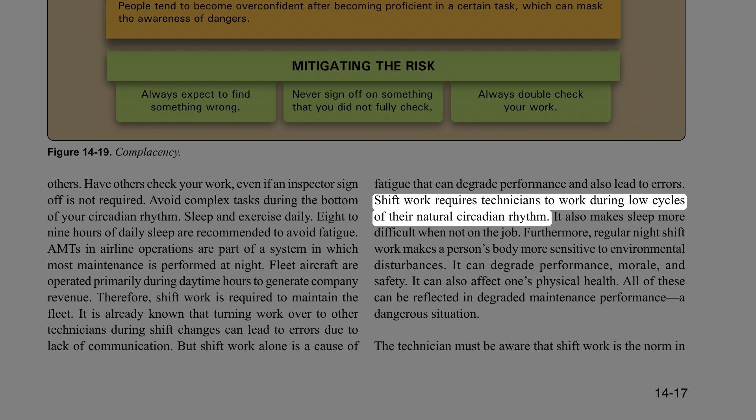It is already known that turning work over to other technicians during shift changes can lead to errors due to lack of communication. But shift work alone is a cause of fatigue that can degrade performance and also lead to errors. Shift work requires technicians to work during low cycles of their natural circadian rhythm. It also makes sleep more difficult when not on the job.

Furthermore, regular night shift work makes a person's body more sensitive to environmental disturbances. It can degrade performance, morale, and safety. It can also affect one's physical health. All of these can be reflected in degraded maintenance performance, a dangerous situation.

The technician must be aware that shift work is the norm in aviation. Avoidance of fatigue is part of the job. Title 14 of the Code of Federal Regulations, 14 CFR, Part 121, Section 377, only requires 24 hours time off during a week of work. Since this is obviously not enough, it is up to companies and technicians to regulate shift work and time off to reduce the potential for errors.

Most importantly, each technician must monitor and control their sleep habits to avoid fatigue. Lack of resources can interfere with a person's ability to complete a task because of a lack of supplies and support. Low-quality products also affect one's ability to complete a task.

Aviation maintenance demands proper tools and parts to maintain a fleet of aircraft. Any lack of resources to safely carry out a maintenance task can cause both non-fatal and fatal accidents. For example, if an aircraft is dispatched without a functioning system that is typically non-essential for flight but suddenly becomes needed, this could create a problem.

Parts are not the only resources needed to do a job properly, but all too frequently parts become a critical issue. AMTs can try to be proactive by checking suspected areas or tasks that may require parts at the beginning of the inspection. Aircraft on ground, AOG, is a term in aviation maintenance indicating that a problem is serious enough to prevent an aircraft from flying.

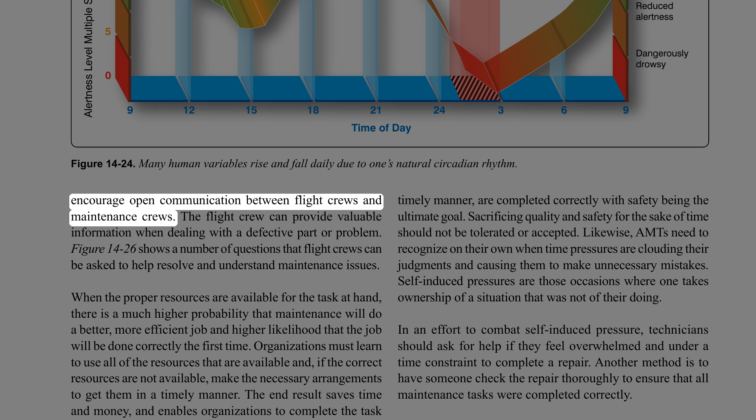Another valuable resource that the maintenance department should rely on is the flight crew. Organizations should encourage open communication between flight crews and maintenance crews. The flight crew can provide valuable information when dealing with a defective part or problem. Figure 14-26 shows a number of questions that flight crews can be asked to help resolve and understand maintenance issues.

When the proper resources are available for the task at hand, there is a much higher probability that maintenance will do a better, more efficient job and higher likelihood that the job will be done correctly the first time. Organizations must learn to use all of the resources that are available and, if the correct resources are not available, make the necessary arrangements to get them in a timely manner. The end result saves time and money, and enables organizations to complete the task knowing the aircraft is airworthy.

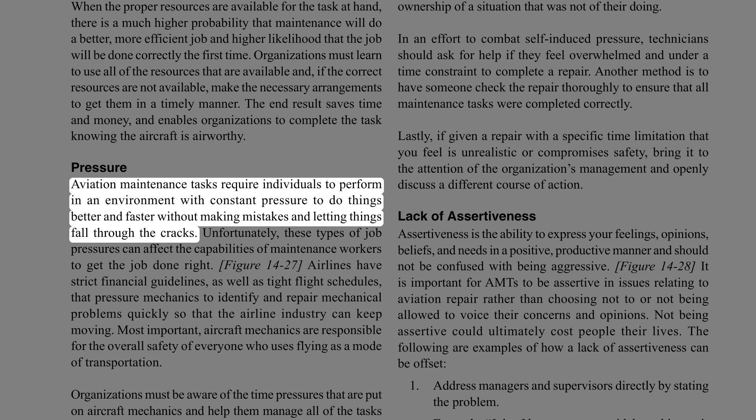Pressure. Aviation maintenance tasks require individuals to perform in an environment with constant pressure to do things better and faster without making mistakes and letting things fall through the cracks. Unfortunately, these types of job pressures can affect the capabilities of maintenance workers to get the job done right.

Airlines have strict financial guidelines, as well as tight flight schedules, that pressure mechanics to identify and repair mechanical problems quickly so that the airline industry can keep moving. Most important, aircraft mechanics are responsible for the overall safety of everyone who uses flying as a mode of transportation.

Organizations must be aware of the time pressures that are put on aircraft mechanics and help them manage all of the tasks that need to be completed so that all repairs, while done in a timely manner, are completed correctly with safety being the ultimate goal. Sacrificing quality and safety for the sake of time should not be tolerated or accepted.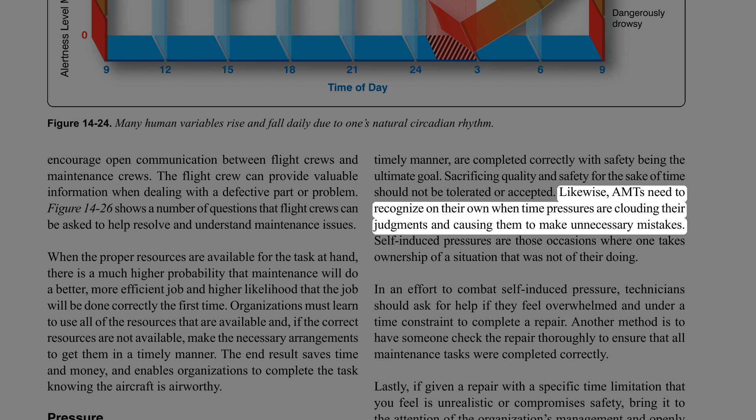Likewise, AMTs need to recognize on their own when time pressures are clouding their judgments and causing them to make unnecessary mistakes. Self-induced pressures are those occasions where one takes ownership of a situation that was not of their doing. In an effort to combat self-induced pressure, technicians should ask for help if they feel overwhelmed and under a time constraint to complete a repair.

Another method is to have someone check the repair thoroughly to ensure that all maintenance tasks were completed correctly. Lastly, if given a repair with a specific time limitation that you feel is unrealistic or compromises safety, bring it to the attention of the organization's management and openly discuss a different course of action.

Lack of assertiveness. Assertiveness is the ability to express your feelings, opinions, beliefs, and needs in a positive, productive manner and should not be confused with being aggressive. It is important for AMTs to be assertive in issues relating to aviation repair rather than choosing not to or not being allowed to voice their concerns and opinions. Not being assertive could ultimately cost people their lives.

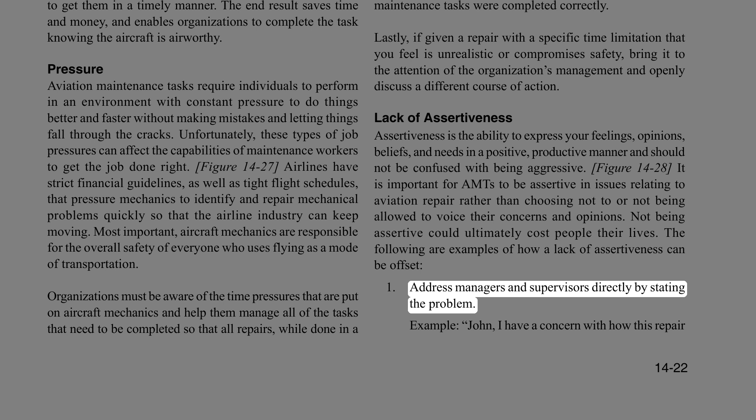The following are examples of how a lack of assertiveness can be offset. Address managers and supervisors directly by stating the problem. Example: John, I have a concern with how this repair is being rushed. Explain what the consequences will be. Example: if we continue, the result will be that the part will break sooner rather than later.

Propose possible solutions to the problem. Example: we could try doing things another way, or you may want to try this way. Always solicit feedback and include other opinions. Example: John, what do you think?

When being assertive with coworkers or management, deal with one issue at a time rather than trying to tackle a number of problems at once. It is also important to have documentation and facts to back up your argument, which can give people a visual account of what you are trying to explain. A lack of assertiveness in failing to speak up when things do not seem right has resulted in many fatal accidents.

This can easily be changed by promoting good communication between coworkers and having an open relationship with supervisors and management. Maintenance managers must be familiar with the behavior styles of the people they supervise and learn to utilize their talents, experience, and wisdom. As employees become aware of behavior styles and understand their own behavior, they see how they unwittingly contribute to some of their own problems and how they can make adjustments.

Assertive behavior may not be a skill that comes naturally to every individual, but it is a critical skill to achieve effectiveness. AMTs should give supervisors and management the kind of feedback required to ensure that they will be able to assist mechanics in doing their job.

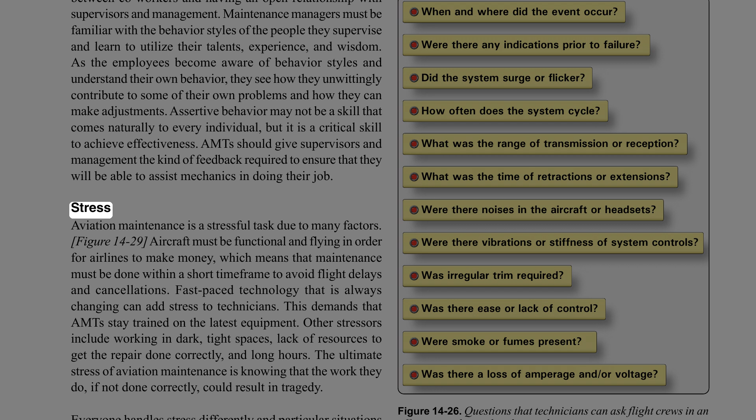Stress. Aviation maintenance is a stressful task due to many factors. Aircraft must be functional and flying in order for airlines to make money, which means that maintenance must be done within a short time frame to avoid flight delays and cancellations.

Fast-paced technology that is always changing can add stress to technicians. This demands that AMTs stay trained on the latest equipment. Other stressors include working in dark, tight spaces, lack of resources to get the repair done correctly, and long hours. The ultimate stress of aviation maintenance is knowing that the work they do, if not done correctly, could result in tragedy.

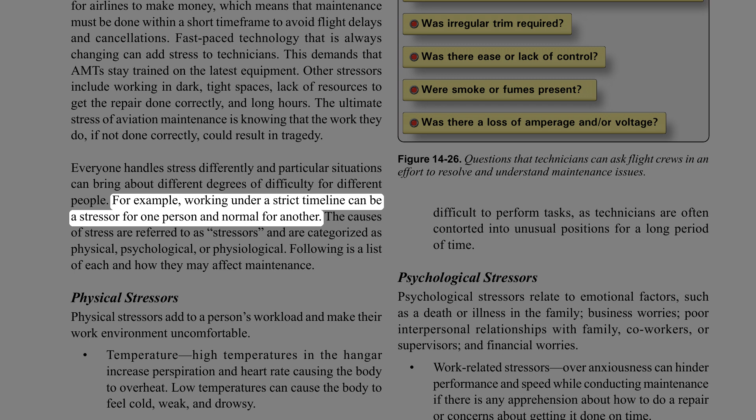Everyone handles stress differently, and particular situations can bring about different degrees of difficulty for different people. For example, working under a strict timeline can be a stressor for one person and normal for another. The causes of stress are referred to as stressors and are categorized as physical, psychological, or physiological. Following is a list of each and how they may affect maintenance.

Physical stressors add to a person's workload and make their work environment uncomfortable. Temperature: high temperatures in the hangar increase perspiration and heart rate, causing the body to overheat. Low temperatures can cause the body to feel cold, weak, and drowsy.

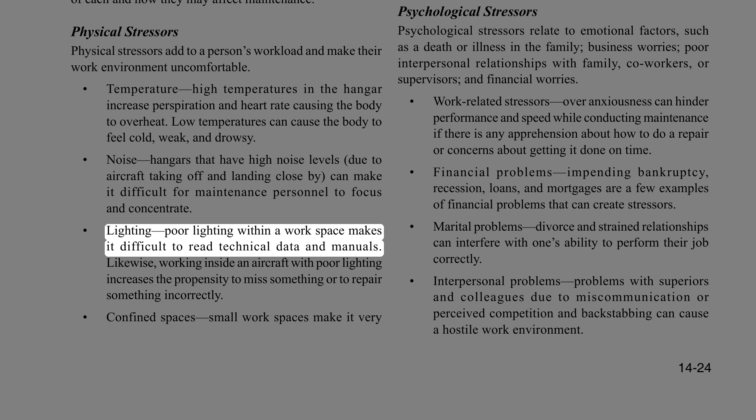Noise: hangars that have high noise levels, due to aircraft taking off and landing close by, can make it difficult for maintenance personnel to focus and concentrate. Lighting: poor lighting within a workspace makes it difficult to read technical data and manuals. Likewise, working inside an aircraft with poor lighting increases the propensity to miss something or to repair something incorrectly.

Confined spaces: small workspaces make it very difficult to perform tasks, as technicians are often contorted into unusual positions for a long period of time.

Psychological stressors relate to emotional factors, such as a death or illness in the family, business worries, poor interpersonal relationships with family, coworkers, or supervisors, and financial worries.

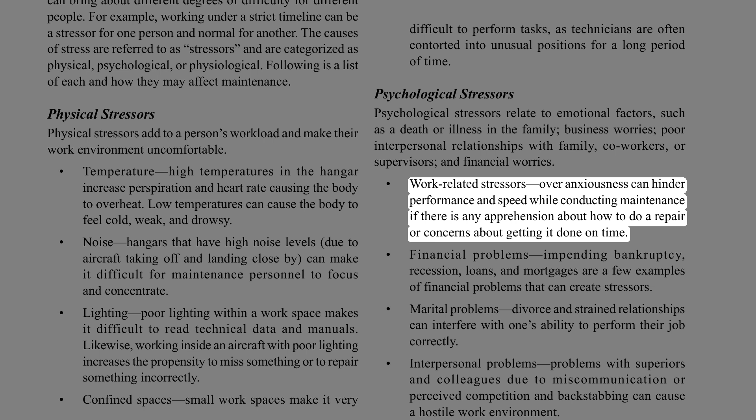Work-related stressors: over-anxiousness can hinder performance and speed while conducting maintenance if there is any apprehension about how to do a repair or concerns about getting it done on time.

Financial problems: impending bankruptcy, recession, loans, and mortgages are a few examples of financial problems that can create stressors. Marital problems: divorce and strained relationships can interfere with one's ability to perform their job correctly.

Interpersonal problems: problems with superiors and colleagues due to miscommunication or perceived competition and backstabbing can cause a hostile work environment. Physiological stressors include fatigue, poor physical condition, hunger, and disease.

Poor physical condition: trying to work when ill or not feeling well can force the body to use more energy fighting the illness, leaving less energy to perform vital tasks.

Proper meals: not eating enough, or eating foods lacking the proper nutrition, can result in low energy and induce symptoms like headaches and shaking. Lack of sleep.

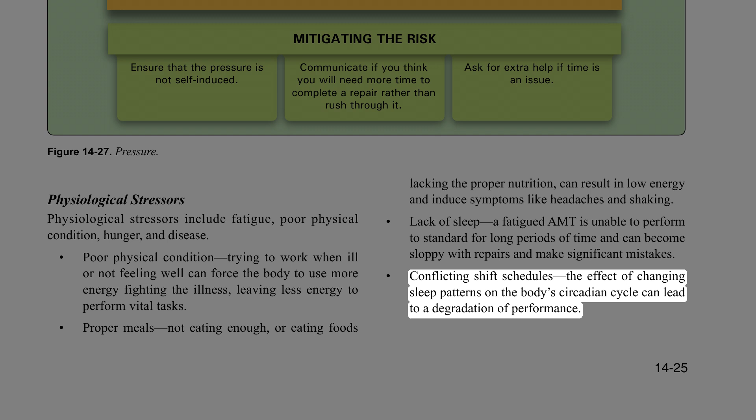A fatigued AMT is unable to perform to standard for long periods of time and can become sloppy with repairs and make significant mistakes. Conflicting shift schedules: the effect of changing sleep patterns on the body's circadian cycle can lead to a degradation of performance.

People cope with stress in many different ways. Specialists say that the first step is to identify stressors and the symptoms that occur after exposure to those stressors. Other recommendations involve development or maintenance of a healthy lifestyle with adequate rest and exercise, a healthy diet, limited consumption of alcoholic drinks, and avoidance of tobacco products.

Lack of awareness is defined as a failure to recognize all the consequences of an action, or lack of foresight. In aviation maintenance, it is not unusual to perform the same maintenance tasks repeatedly. After completing the same task multiple times, it is easy for technicians to become less vigilant and develop a lack of awareness of what they are doing and what is around them. Each time a task is completed, it must be treated as if it were the first time.

Norms is short for normal, or the way things are normally done. They are unwritten rules that are followed or tolerated by most organizations.

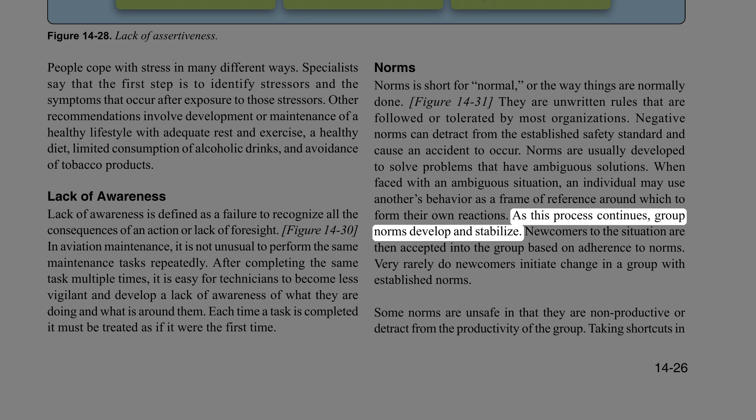Negative norms can detract from the established safety standard and cause an accident to occur. Norms are usually developed to solve problems that have ambiguous solutions. When faced with an ambiguous situation, an individual may use another's behavior as a frame of reference around which to form their own reactions. As this process continues, group norms develop and stabilize.

Newcomers to the situation are then accepted into the group based on adherence to norms. Very rarely do newcomers initiate change in a group with established norms. Some norms are unsafe in that they are non-productive or detract from the productivity of the group. Taking shortcuts in aircraft maintenance, working from memory, or not following procedures are examples of unsafe norms.

Newcomers are better able to identify these unsafe norms than long-standing members of the group. On the other hand, the newcomer's credibility depends on their assimilation into the group. The newcomer's assimilation, however, depends on adherence to the group norms. Everyone should be aware of the perceptiveness of newcomers in identifying unhealthy norms and develop a positive attitude toward the possibility that norms may need to be changed.

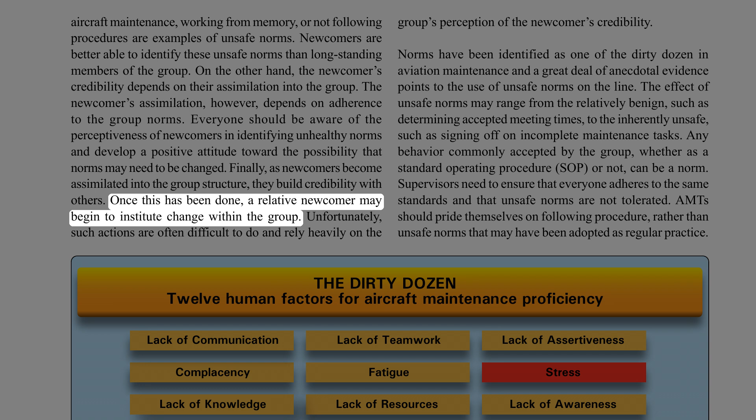Finally, as newcomers become assimilated into the group structure, they build credibility with others. Once this has been done, a relative newcomer may begin to institute change within the group. Unfortunately, such actions are often difficult to do and rely heavily on the group's perception of the newcomer's credibility.

Norms have been identified as one of the dirty dozen in aviation maintenance, and a great deal of anecdotal evidence points to the use of unsafe norms on the line. The effect of unsafe norms may range from the relatively benign, such as determining accepted meeting times, to the inherently unsafe, such as signing off on incomplete maintenance tasks.

Any behavior commonly accepted by the group, whether as a standard operating procedure, SOP, or not, can be a norm. Supervisors need to ensure that everyone adheres to the same standards and that unsafe norms are not tolerated. AMTs should pride themselves on following procedure, rather than unsafe norms that may have been adopted as regular practice.

Example of common maintenance errors. In an effort to identify the most frequently occurring maintenance discrepancies, the United Kingdom Civil Aviation Authority, CAA, conducted in-depth studies of maintenance sites on aviation maintenance operations. The following list is what they found to be the most common occurring maintenance errors.

Incorrect installation of components, fitting of wrong parts, electrical wiring discrepancies to include crossing connections, forgotten tools and parts, failure to lubricate, failure to secure access panels, fairings, or cowlings, fuel or oil caps and fuel panels not secured, failure to remove lock pins. All of the maintenance discrepancies listed above can be avoided if the proper procedures are followed on the job card that is being used.

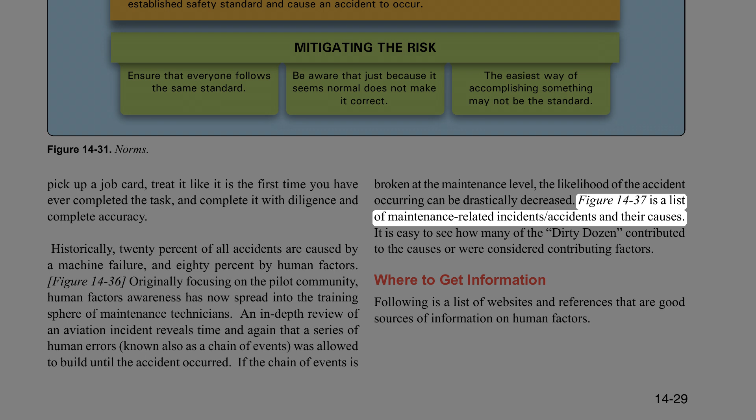If the chain of events is broken at the maintenance level, the likelihood of the accident occurring can be drastically decreased. Figure 14-37 is a list of maintenance-related incidents, accidents and their causes. It is easy to see how many of the dirty dozen contributed to the causes or were considered contributing factors. Where to get information. Following is a list of websites and references that are good sources of information on human factors.

Incident on March 20, 2001. A Lufthansa Airbus A320 almost crashed shortly after takeoff because of reversed wiring in the captain's sidestick flight control. Quick action by the co-pilot, whose sidestick was not faulty, prevented a crash. Because the investigation has focused on maintenance on the captain's controls carried out by Lufthansa Technik just before the flight.

During the previous flight, a problem with one of the two aileron computers, ELAC, had occurred. An electrical pin in the connector was found to be damaged and was replaced. It has been confirmed that two pairs of pins inside the connector had accidentally been crossed during the repair.

This changed the polarity in the sidestick and the respective control channels, bypassing the control unit, which might have sensed the error and would have triggered a warning. Clues might have been seen on the Electronic Centralized Aircraft Monitor (ECAM) screen during the flight control checks, but often pilots only check for a deflection indication, not the direction.

Before the aircraft left the hangar, a flight control check was performed by the mechanic, but only using the first officer's side stick.

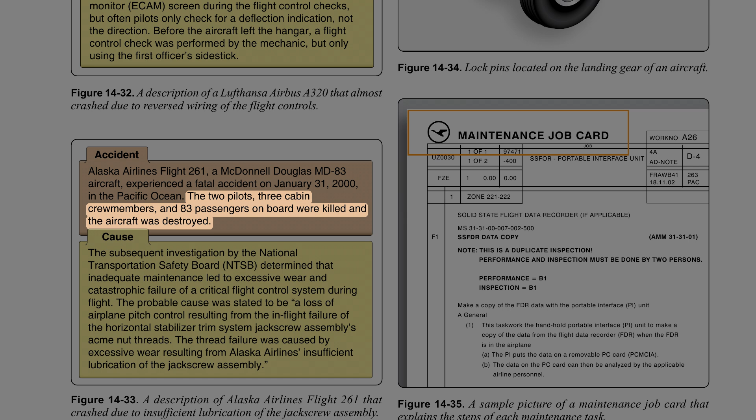Accident: Alaska Airlines Flight 261, a McDonnell Douglas MD-83 aircraft, experienced a fatal accident on January 31, 2000, in the Pacific Ocean. The 2 pilots, 3 cabin crew members, and 83 passengers on board were killed and the aircraft was destroyed. The subsequent investigation by the National Transportation Safety Board, NTSB, determined that inadequate maintenance led to excessive wear and catastrophic failure of a critical flight control system during flight.

The probable cause was stated to be a loss of airplane pitch control resulting from the in-flight failure of the horizontal stabilizer trim system jack screw assembly's Acme nut threads. The thread failure was caused by excessive wear resulting from Alaska Airlines' insufficient lubrication of the jack screw assembly.

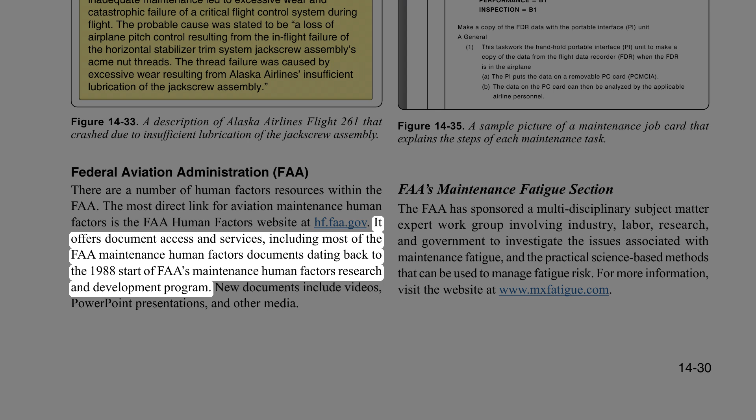Federal Aviation Administration, FAA. There are a number of human factors resources within the FAA. The most direct link for aviation maintenance human factors is the FAA Human Factors website at hf.faa.gov. It offers document access and services, including most of the FAA Maintenance Human Factors documents dating back to the 1988 start of FAA's Maintenance Human Factors Research and Development Program. New documents include videos, PowerPoint presentations, and other media.

FAA's Maintenance Fatigue section. The FAA has sponsored a multidisciplinary subject matter expert work group involving industry, labor, research, and government to investigate the issues associated with maintenance fatigue and the practical science-based methods that can be used to manage fatigue risk. For more information, visit the website at www.mxfatigue.com.

FAA Safety Team. The FAA Safety Team has a dedicated website that provides up-to-date information on safety concerns, upcoming seminars, featured courses and resources. For more information, visit the website at www.faasafety.gov.

Other resources: System Safety Services. The mission of System Safety Services is to assist clients in developing the best possible safety system to meet their needs. They have an experienced and professional team of individuals with years of experience in aviation and human factors. The website provides a lot of information on human factors, including articles, upcoming events, presentations, safety videos, training aids, and workshops.

For more information, visit their website at www.system-safety.com. Human Factors and Ergonomics Society, HFES.

The Human Factors and Ergonomics Society, HFES, is the only organization in the United States dedicated specifically to the human factors profession. The HFES was formed in 1957 and typically maintains about 5,000 members. For more information, visit their website at...